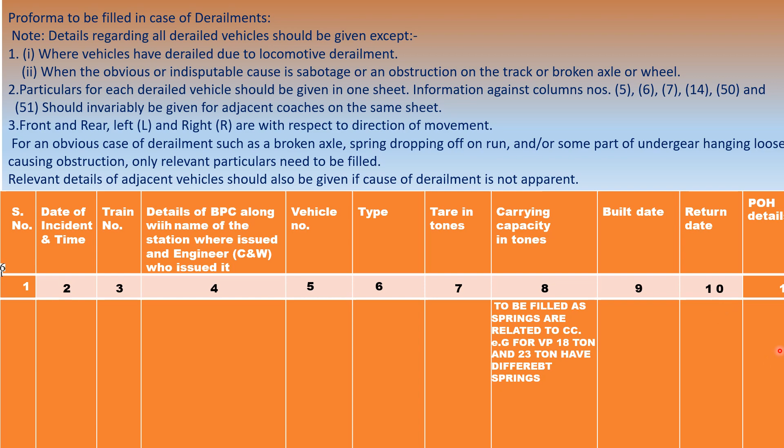We move on to column 15, which deals with the wheel gauge in millimeters, to be measured at 3 locations, in empty condition at a horizontal plane passing through the center of axle, as per para 2.6.8 of IRCA part 4. Part 3 is for goods stock, and part 4 is for coaching stock. So the limit is 1600 plus 2 minus 1. So the gauge is either 1599 or 1600 or 1602. If it varies at 3 points, that indicates a bent axle or improper disking.

Then we have wheel diameter. As we all know, the shop turned diameter is 837 millimeters, and the minimum diameter of coaching stock is 813 millimeters. Shop turn dia means any vehicle when turned out from the shop after a POH, the wheel dia should not be less than 837. That restriction is because in service, due to wear and tear, it should not go below the condemnation limit of 813 millimeters.

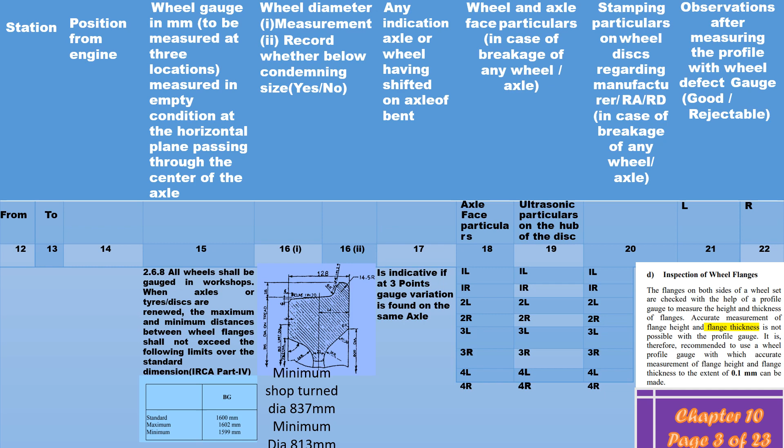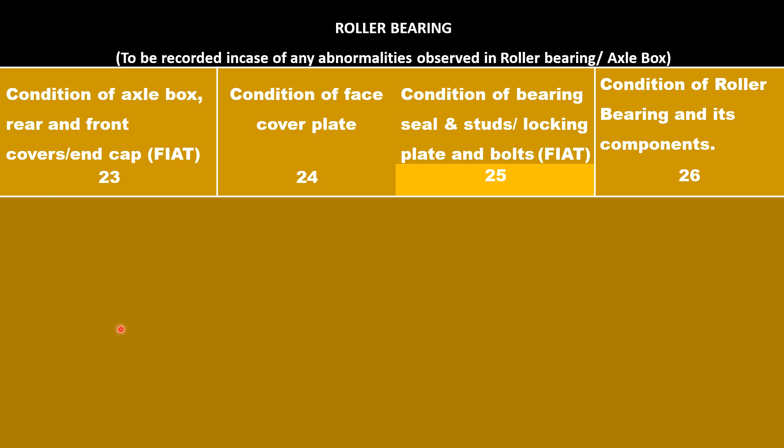Columns 23, 24, 25 and 26 pertain to records in case of abnormalities observed in roller bearing and axle box failures. So we move on to the next column.

This is the most important part of the proforma related to spring and spring gear. The first column deals with the condition of coil suspension spring, whether it's normal, fractured, or broken, whether it is freshly broken or has old breaking marks. Next is the condition of rubber spring - normal, cracked, including length of crack - and this pertains to LHB. Of course, I will make a separate video and presentation on LHB coach measurements. But as far as this column is concerned, normally we see that leakage of pressure has to be checked. In case of leakage in the secondary spring, we need to check the leakage and its height. So the height for LHB is 287 to 292, while for ICF it's 255 to 260 mm.

Then we move on to deflected height of coil spring after re-railing on a level and uncanted track. There is a lot of confusion here. Once the readings become abrupt, there is always a complaint that the track is not level or this or that. So it is very important while taking the measurement to measure the cross level where the coach is placed. Nowadays, especially in pits, we can correct the level by placing additional rubber pads, and we can correct the level to zero. So the level should be corrected to zero, and then the deflected height should be taken, as I have marked, in between the bottom of the top compensating ring and the top of the bottom compensating ring. So this is the deflected height. With entire packing, the total height should not increase more than 295 mm, as I have shown here.

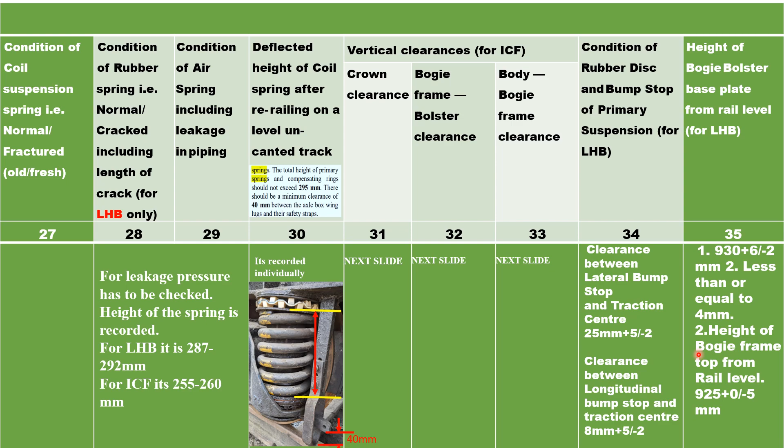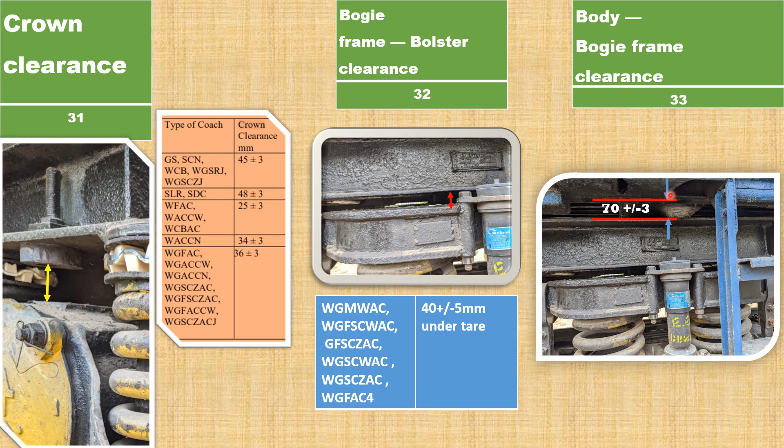Then we have the bogie frame to bolster clearance, under column 32. This is the place where we measure this parameter: the bolster top and the bottom of the bogie frame, and this is 40 plus minus 5 under tare. And this, again, from the top of the bogie frame to the bottom of the body, this clearance is known as body bogie frame clearance, and this is 70 plus minus 3 millimeters.

This is the chart showing the testing parameters of AC coaches for RCF-made coaches, as per RCF drawing. Here we have the type of coach, the tare weight of the coach, and the normal payload, which is of course not of much importance as far as measurements are concerned. So whatever we have to note down are these parameters C, D, G, and that too under tare. For each type of coach we have different readings. Some may be common, and this is the bogie frame bolster clearance, bogie body clearance, and then axle box spring height, under tare.

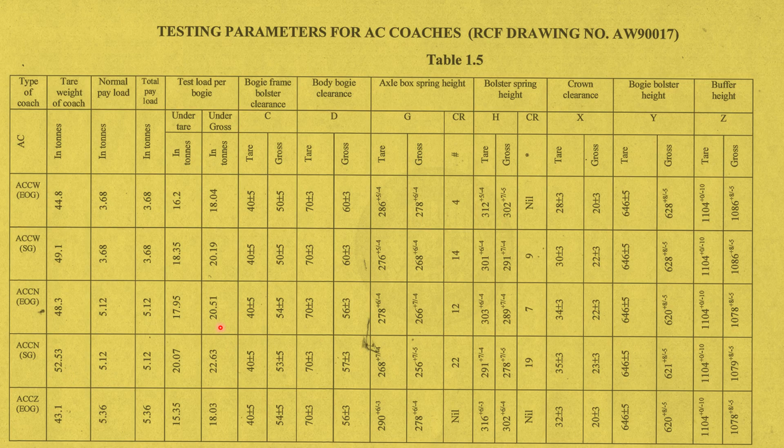This is the working height of the spring, and these are the tolerances given as small letter subscriptions. Then we have bolster spring height under tare, then crown clearance under tare, which is different for different coaches, varying a little bit. Then we have the bogie bolster height, and the buffer height, given under tare and under gross weight. Generally for coaching stock we take the measurements which are under tare.

Similarly, this chart also is for different types of coaching stock, with the same parameters given for different types of coaching stock. These are available in the ICF coaching manual, and one can very easily access it. However, I have tried to give it as a ready reference for the viewers.

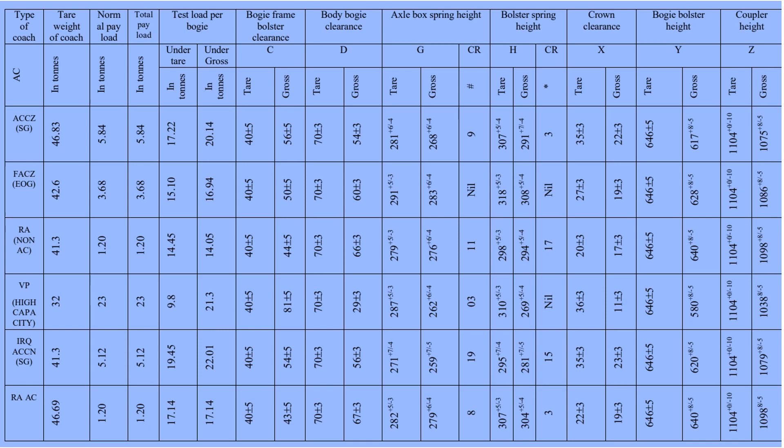And then we have the condition of control arm, rubber element, and bore. So if the control arm bearing surface reaches a diameter of 230.5 mm, veering out by more than 0.5 mm, the control arm should be considered as worn out and it's rejected.

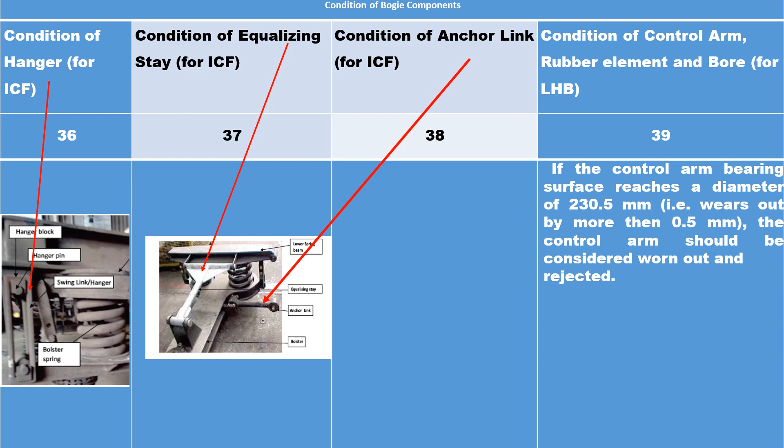This part of the damping system deals with the condition of axle guide cum dash pot, including oil level for ICF. So this is in fact the top side of the dash pot. To measure the oil level,

this bolt is opened out and there is a hole. So this is the dipstick attached with a spring type of wire, flexible wire, metallic, and this is inserted in this hole, and the level of oil is checked on this dipstick.

So this should not be less than 40 mm. This is the hydraulic damper, and mostly these are found to be loose, or bolts missing, or just having lost function. So this condition should be checked, whether it is working properly or not.

Then this is the condition of anti-roll bar for LHB. So this is an attachment like this way. I have shown it separately with a different color to just illustrate it properly.

And it is tied with a bolster this way, and its soundness is checked, whether it is loose or tight or proper, is checked that way.

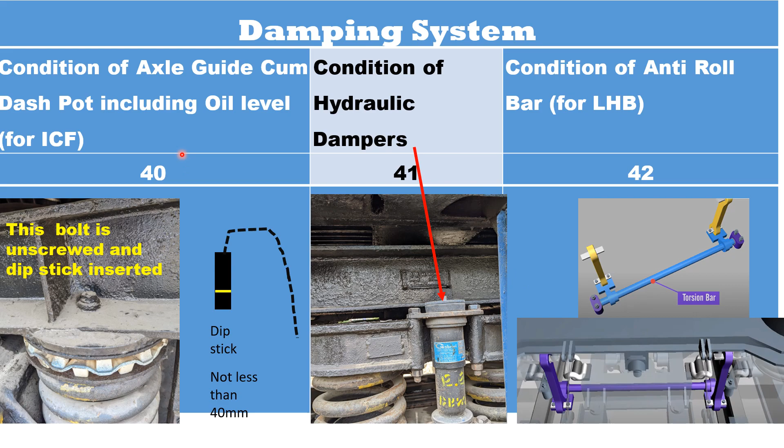Next comes the system of bogie rotation and clearances. So here we have condition of center pivot including verticality of the pivot pin for ICF. We need to check the pivot pin whether it is vertical or bent, and the condition of the side bearer.

Now this bottom plate is known as the wearing plate, and this is the bronze wearing piece. Its rejection limit is at 42. When this height reaches 42, it is said to be at rejection limit.

Clearance between traction center and longitudinal, this I will give in the next slide.

Remarks regarding free movement of bolster and pivot and their condition. So we need to look for uneven wear on the pin or pinhole, and the condition of grounding cables, wheel slip protection device. These are only connections which have to be seen. The ground wires are just connected with a bolt system.

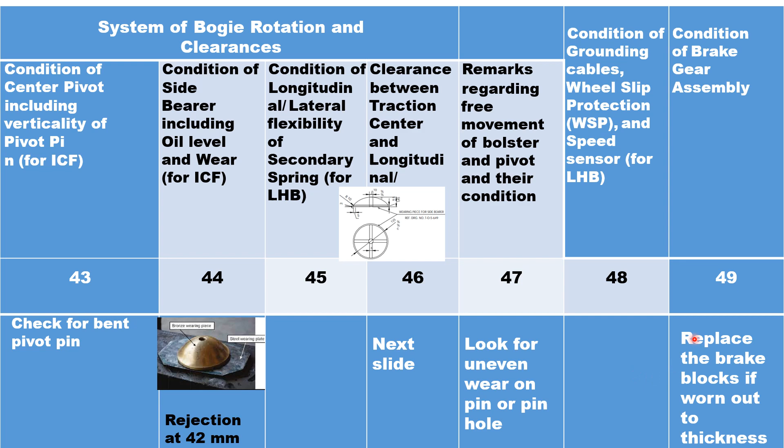And brake blocks, if less than 20 mm, they are to be replaced.

This is from the previous slide, just an elaborate picture of a lateral bump stop. So gauge and depth calipers, and the limit is L is 60 and T is 7. So this is 60, and this is the critical area.

If this is worn out, replace if L is less than 30. So if this has gone to 30, then it is to be replaced. And here, if the limits of 7 mm and 60 mm are exceeded, then this requires to be replaced.

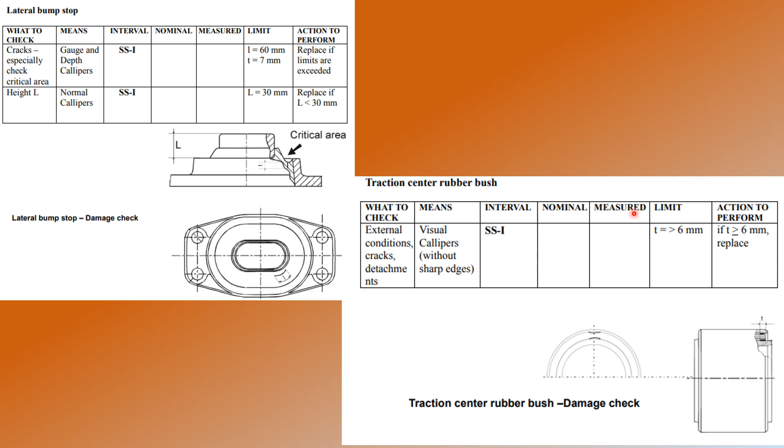Here also we have traction center rubber bush, and the critical area is shown over here. So action to perform: if this T is more than 6 mm, this requires replacement.

Next comes buffer coupler height, to be taken again on level uncanted track after uncoupling. The limits from production unit are maximum height from rail level 1105 and minimum 1095, and from workshops it's 1105 and 1090.

Then we have condition of side buffers: working, dead, drooping, entanglement. Once we see these are entangled, it can be known as entangled. Drooping means if the height is less, the projection of the buffer is 635.

In the next column we have details of broken parts, giving location with respect to point of mount, point of drop, whether the broken part has fallen before or after the point of drop, whether it is a pre-fall or post-derailment fall, and any other defect.

Now let me discuss a case history of a derailment of an express train. There were 10 coaches which had derailed without any point of mount, and the rails were found broken, but all were fresh breaks. It was a derailment where the wheels derailed on the inside rail, not outside the curve but inside the curve.

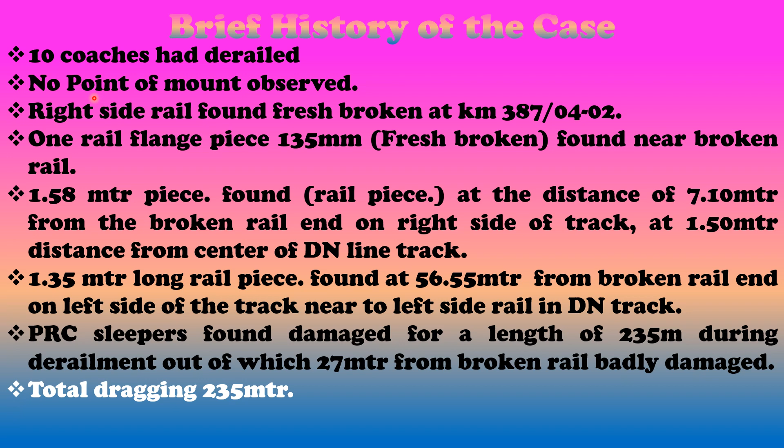The train had stopped, and after a brief stop it started, and there was a sudden acceleration in the train which led to a stringing action on curvature, causing excessive lateral force on the inner rail of the curve by the inner wheels. In the next slide we will see the derailed position and the track.

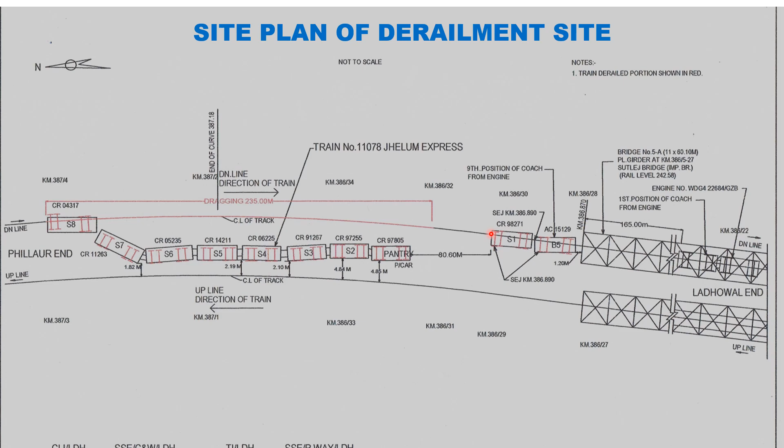This is the site plan of the derailment site. This is the engine side, and this is a curve. All the vehicles have derailed inside the curvature. There is a double line section - this is one line, this is the other line. This B5 was the first to derail, with S1 following B5.

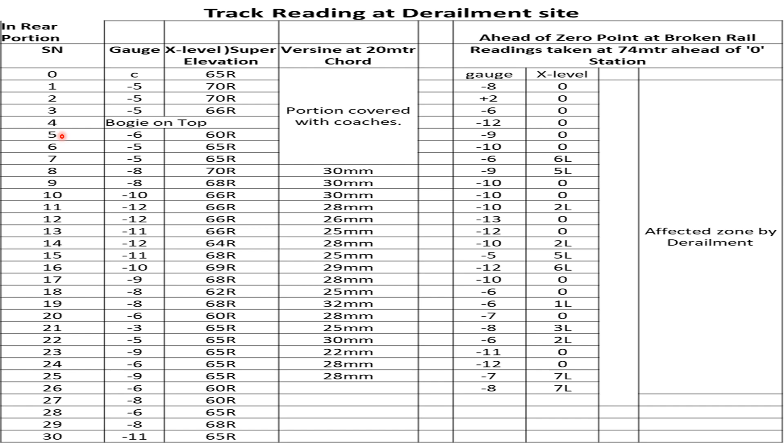Well, these are the track parameters. Don't find anything abnormal with the track. Versines are very good, as well as the cross level. So hardly anything to discuss here.

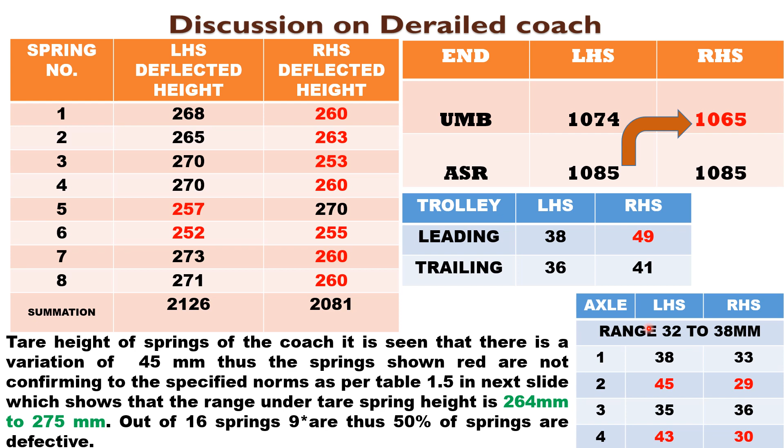That's why when we say one can see with the eyes and tell - this is the only reason one can say, yes, visually you can examine and identify whether the springs will respond to your required working height or not.

Well friends, now let's summarize what we have discussed. First was the buffer height, the deflected height of springs, axle box, crown clearance, bolster bogie clearance, bogie body frame clearance, side bearer bronze piece, side bearer plate thickness, center pivot, wheel diameter, wheel gauge, dashpot oil level, and finally the tire defects.